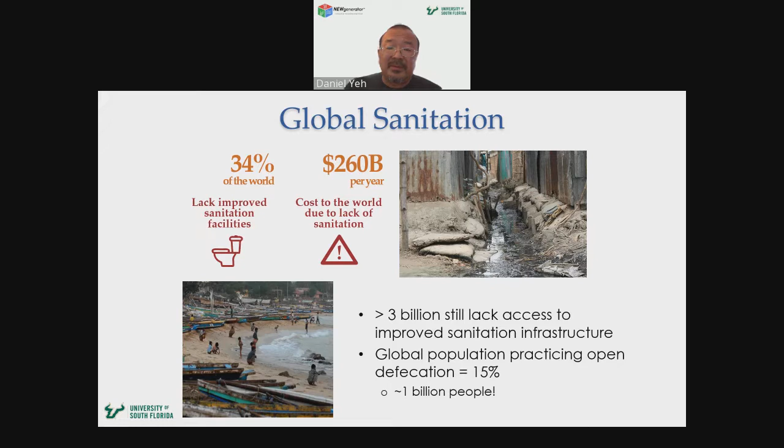So it's a big problem, and you might wonder why don't we just solve this with the technologies that we have right now? We're often faced with maybe two types of choices when we're looking at sanitation.

Most people here in the United States are familiar with the centralized approach, where we have sewer systems connecting our households, businesses, toilets, collect all the wastewater through the sewer system and send it to a centralized treatment system. And this was largely made possible through the Clean Water Act.

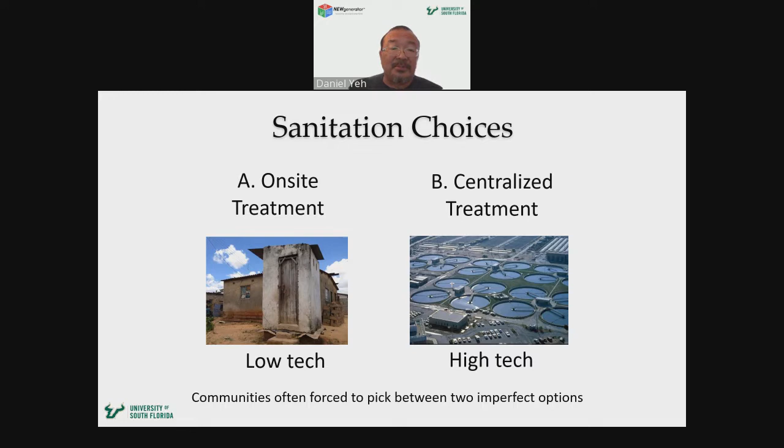We built a lot of infrastructure. And if you don't have this, then you're forced to either use some type of on-site system, such as a septic tank, or if that's not possible due to soil conditions, oftentimes we use something like a pit latrine, right? So we're kind of looking at both of these options, but really not a whole lot of things in between.

Well, neither option is perfect. In terms of the on-site systems such as pit latrines, they're often faced with high usage rates. The ability for the pit to dewater is largely depending on the soil. So if you have poor soil conditions, it fills up very fast, and of course, it's very vulnerable to flooding. If you have a flooding event, and we're seeing more of that now with climate change, the contents of the pit will just be distributed where you don't want them to be.

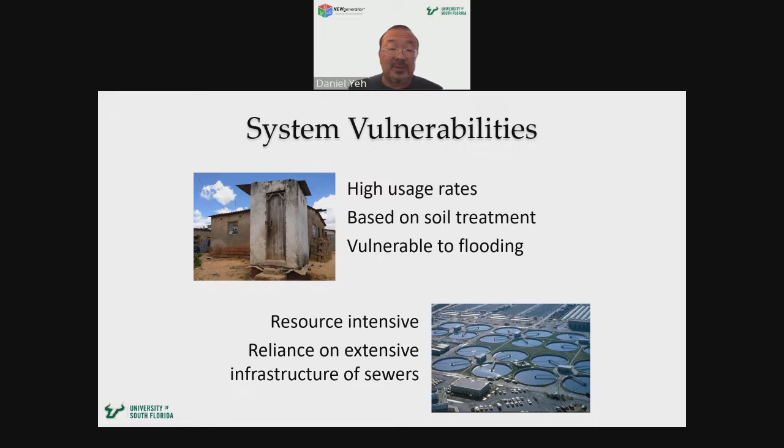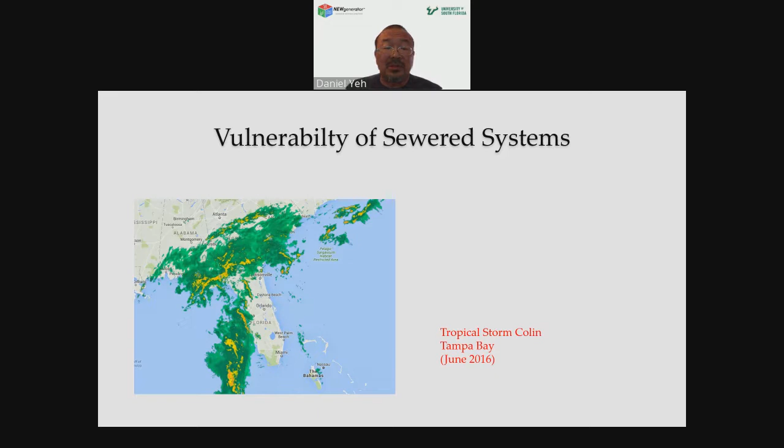So sewer systems are also vulnerable. Here is an example from Florida. I live in Tampa, Florida, and a few years ago we had a tropical storm come through, and you can see that in the weather map here, Tropical Storm Colin.

And the city of St. Pete Beach actually tweeted this out, saying, 'Hey, we have a sewer system emergency. Everyone, please stop using the sewer because the sewer is full.' I don't know about you, I never think about the sewer as an appliance.

It's very surreal. The municipality is pleading with homeowners to stop using the sewer because the storm has inundated the sewer system, largely because of sanitary sewer overflows, infiltration, and inflow problems. So sewer systems are vulnerable, by no means perfect, and there's a lot of maintenance costs involved.

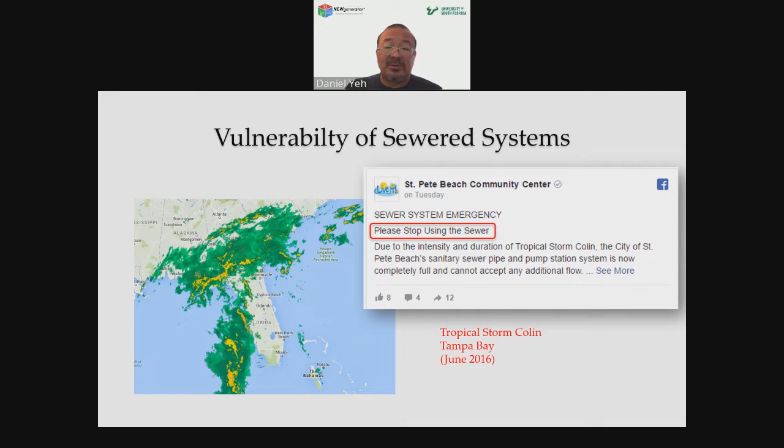At the end of the pipe, we have a centralized wastewater treatment plant, often based on gravity settling. This has issues related to large footprint, since gravity settling systems are land intensive. So this is not going to work where space is at a premium.

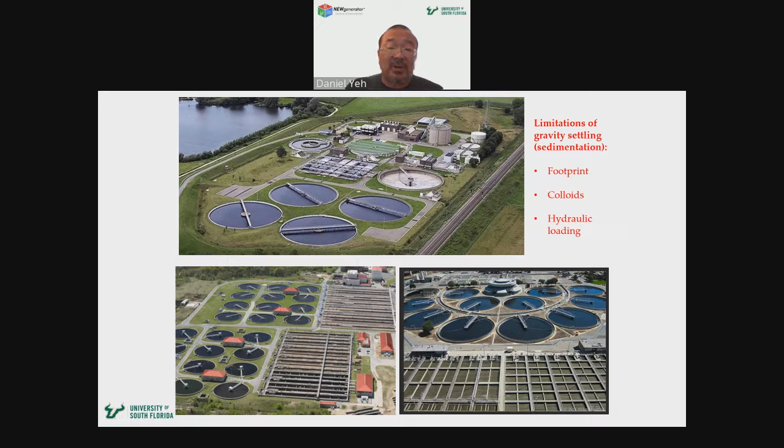For example, in slums, where you have very little space, a lot of crowding, high usage, and oftentimes slums are really unplanned, so it's very difficult to map infrastructure to the organic growth nature of slums. So if you want to provide sanitation in a slum environment, you're going to have to do process intensification, and you need a very compact treatment system, something game changing. If you can pull that off, I think that would be transformative and disruptive.

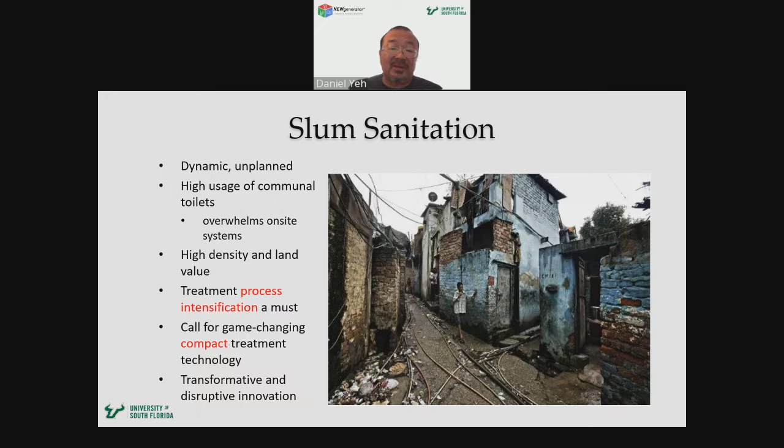So what we're really looking for to make this work is something transformative. It has to be effective, it has to work first of all, but then also it needs to be reliable. It can't just work once or work for a month, it has to continue to work, and you have to know how to maintain the system. The system has to be affordable. The end user may not be the one paying, but somehow the economic model needs to be worked out so that it's ultimately economically sustainable.

And it would be nice if you actually provide an experience that's aspirational, in the same way that we enjoy a lot of household appliances or smartphones. You want to have a good experience going to the bathroom, namely a flush toilet experience, if you will. Oftentimes that's what we get to enjoy in most places in the U.S., and we don't think twice about it, but many places in the world do not have flush toilets, and the experience is different.

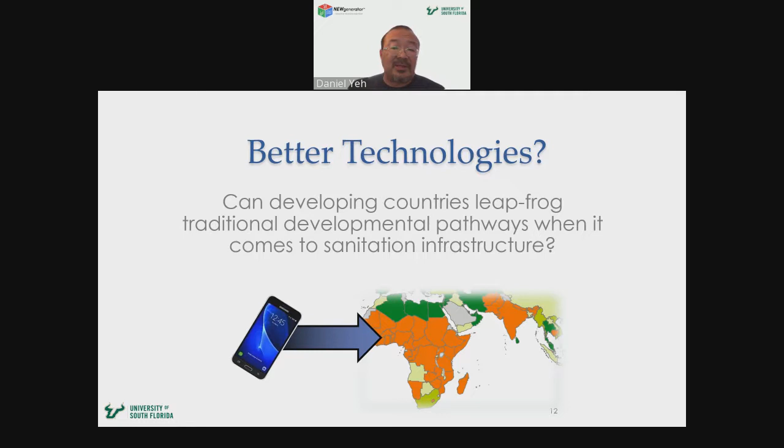So to make that happen, here's the question: as the developing world is building their infrastructure, do they have to go down the same path that developed countries went through, recognizing that sewer systems are not perfect, or can they somehow leapfrog these technologies, the way cell towers leapfrogged landlines in many places in Africa, giving a better technology that doesn't require landlines. So what we're really trying to do is fill the gap here, something that's on site but works a lot better than pit latrines, without all the intensive infrastructure maintenance requirements of centralized sewer systems.

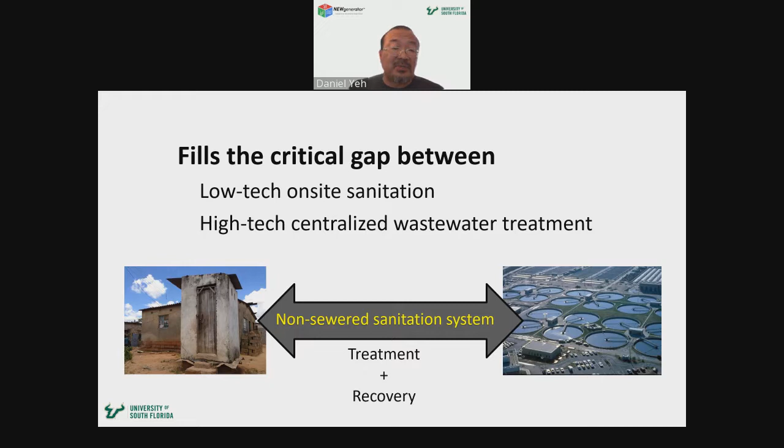So essentially, a non-sewered sanitation system, a platform. And not only do we want to do treatment, we also want to do recovery, because wastewater is a valuable resource. You can recover water, energy, nutrients, a number of things from it. So can we pull that off? That gave inspiration to the NEWgenerator project, or concept.

We envision a resource recovery machine that can recover nutrients, energy, and water on site, hence the name NEWgenerator. It will work as a platform or a box that you can insert near the point of generation, near the point of use. For example, provide a flush toilet possibility to something like a latrine system or a porta potty, and then you can recover the energy, recover the excess water, recover fertilizer, maybe for greenscaping or even to grow crops. The possibilities are endless.

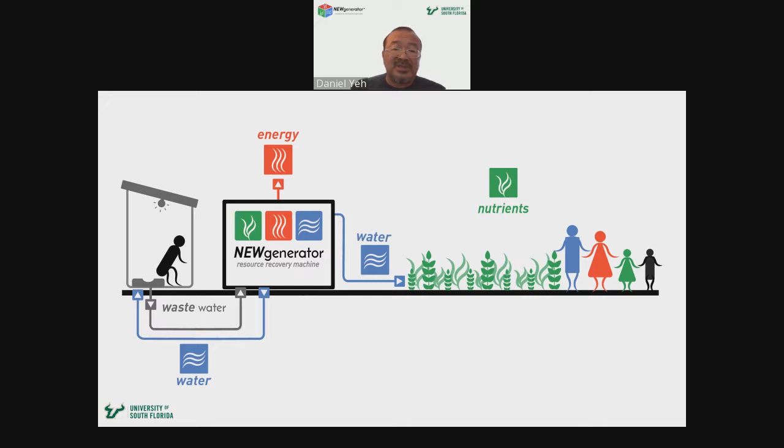So to do this, the first thing we're thinking of was, this really has to be a very non-energy intensive system. If it requires a lot of energy, that's not going to work in many parts of the world because of high energy costs and unreliable grid. So to make the process low energy, we decided to do anaerobic digestion.

This is something a lot of people are familiar with. Essentially, in anaerobic digestion, organic waste is broken down by anaerobic microbes, goes through the various stages of disintegration, hydrolysis, fermentation, and ultimately methanogenesis, so you can make biogas. The nutrients bound up in the organic matter are liberated, so you have inorganic ions of nutrients, and of course, you have water.

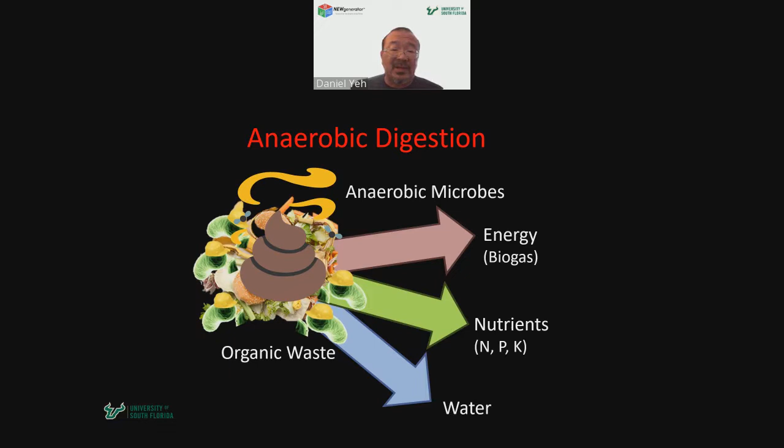The problem with conventional anaerobic digestion is that everything is mixed together, and there's really no good way of doing separation. There's a limit to the technology in terms of separation. Pathogenic organisms and colloidal materials are not going to be separated for the most part. And also, if you overload the system, it's very easy to upset it.

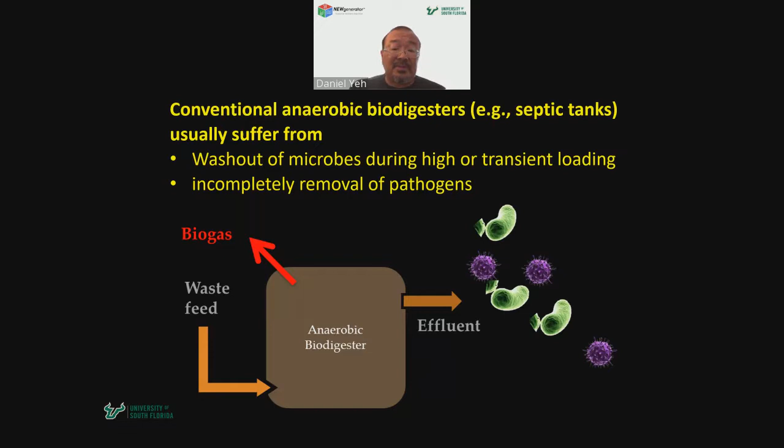So what can we do to improve on the anaerobic digestion process? One thing you can do is add a membrane to it, so that's a hybrid process. You're using a biological plus membrane filtration platform. Essentially, the exit of the bioreactor is covered by a membrane, which in this case is an ultrafiltration membrane, 0.03 microns, which is smaller than bacteria and most viruses.

So we get to keep everything in the bioreactor. The pathogenic organisms, we intercept them, and a lot of them die off in the reactor, or we concentrate them. The slow-growing anaerobic organisms are also kept in the bioreactor, so we overcome some of the kinetic limitations and throughput limitations of conventional anaerobic treatment. You can then combine this process, and this is an anaerobic membrane bioreactor.

And this technology has shown itself to be quite robust and flexible. For example, it's not always the bioreactor that's doing the treatment - every second, every minute, it's actually the membrane during the filtration, during the rejection. So the membrane provides an absolute barrier for very high quality water right off the bat, and really, the biology is there for management of solids and residuals.

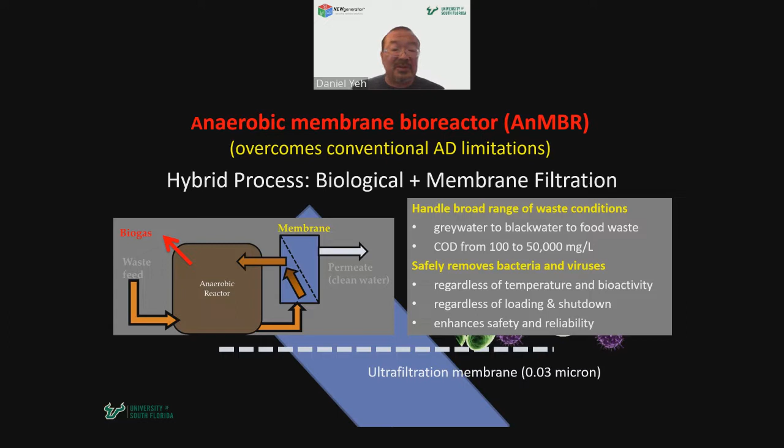Because of that, you can use an AnMBR to treat gray water, black water, or food waste - COD can range from 100 to tens of thousands of milligrams. So it's quite robust, and you can safely remove bacteria and viruses. It doesn't matter what the temperature is, doesn't matter how active the microbes are, and most importantly, you can handle intermittent loading and shutdowns and dormancies, and have very fast restart.

And these are all very important criteria when you're looking at on-site sanitation systems, because they're going to be used in sort of a non-steady state fashion.

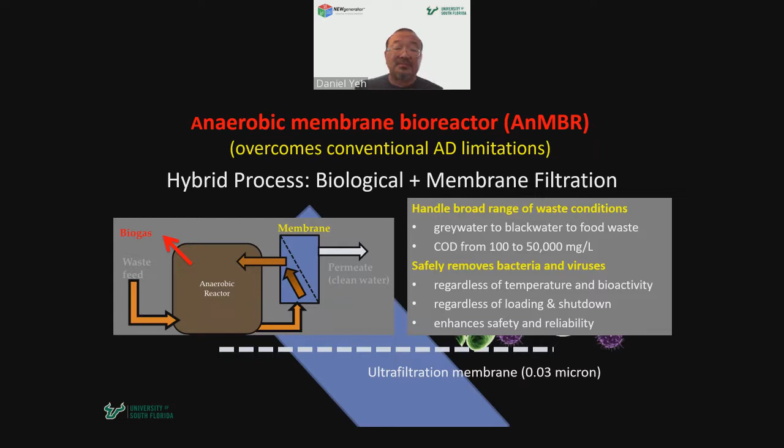How does this anaerobic MBR compare to the more conventional aerobic variety? Well, there's several advantages. One is the much lower biomass production - from your bioprocess class you know that the sludge yield for anaerobic systems is 8 to 10 times less than aerobic microbes. So automatically, there's a much lower desludging requirement, which is one of the pain points for on-site systems. There's no aeration requirement, so you don't have to aerate to keep the bugs alive, and it cuts down considerably on the energy requirement, which improves its reliability because you don't have to provide the energy.

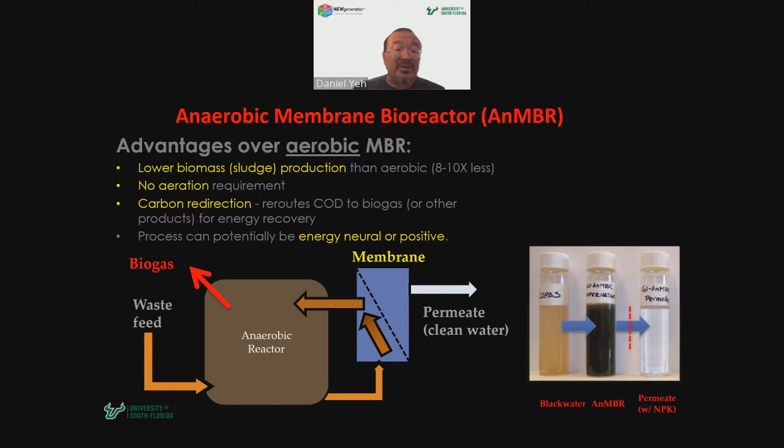Essentially, it's a carbon redirection process. Rather than just oxidizing the carbon and having it be emitted as CO2, we get to redirect it to methane and have the opportunity to capture that as an energy source. So theoretically, we can go energy neutral or even positive with this process.

Now, as we developed this technology, there are a couple of frameworks that guided us. The first one is we were fortunate to participate in the National Science Foundation's I-Corps, or Innovation Corps program. If you haven't had the opportunity to participate in I-Corps, I very much encourage you to do that. There's different ways to get involved - either you have an NSF grant and you can apply for I-Corps, or many universities around the country have I-Corps site programs that students can form teams and participate in.

But what I-Corps does is it helps researchers think all the way down the road in terms of what the customers, the end users, want. A lot of times as researchers, we have assumptions about how our inventions or technologies could be used, and very often there's a mismatch between that and what people really want. So I-Corps takes you through this customer discovery process - you actually talk to people, you find out what their pain points are, and this is really important.

What is really bothering people? What do they wish could change? What do they really want out of some improvement? Because whatever solution you provide, it has to solve that problem - you don't want there to be a mismatch. And also, you start to think about your technology not in terms of features, but in terms of what value proposition you bring to this relationship with the end user. For example, you can make their life better somehow.

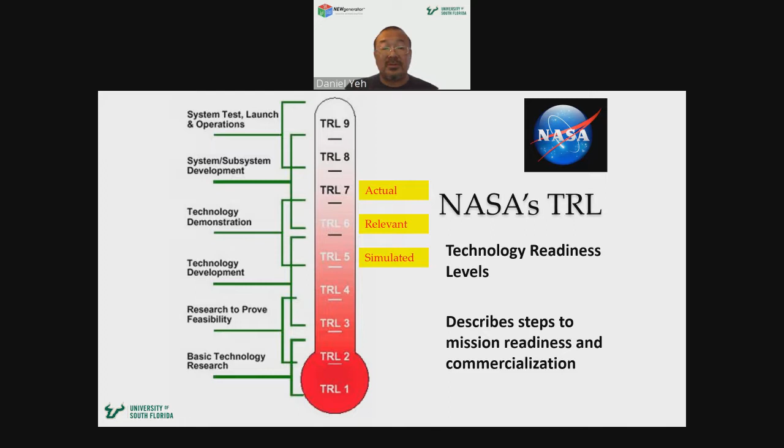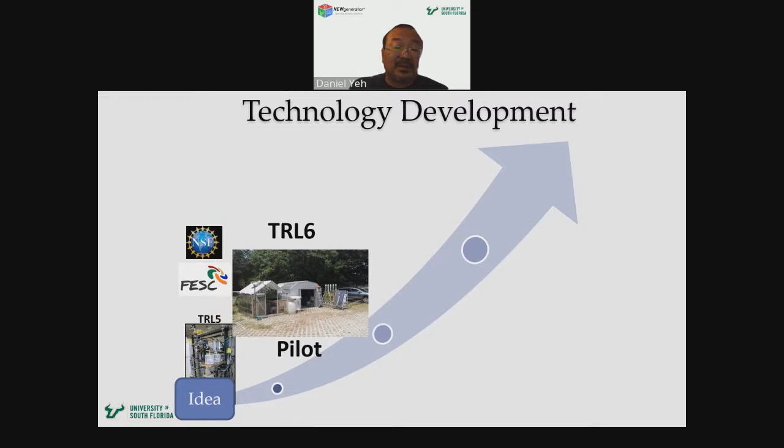So we use this framework to guide our process. We started with the initial ideas and built our laboratory systems—this was the TRL 5 system that I'll describe a little bit, along with the funding sources. Then in the TRL 6 system, we went out of the lab to a septic tank. Later, for TRL 7, we had the opportunity to go to India—that was the early phase of our technology development.

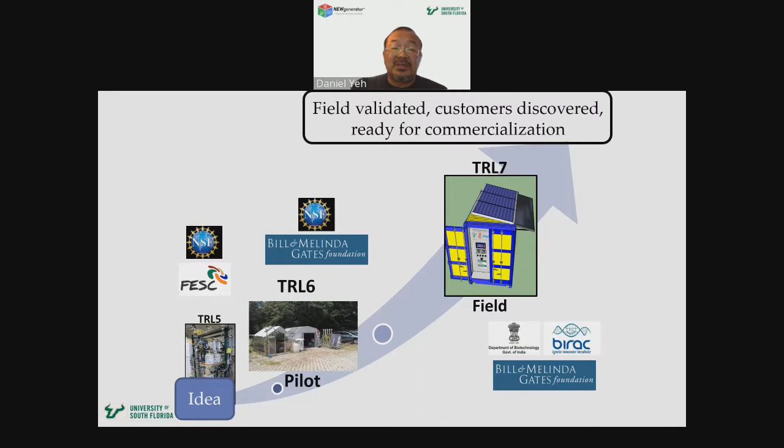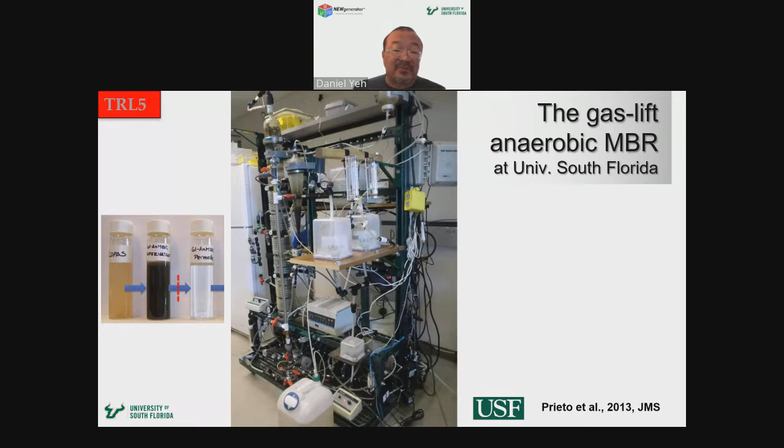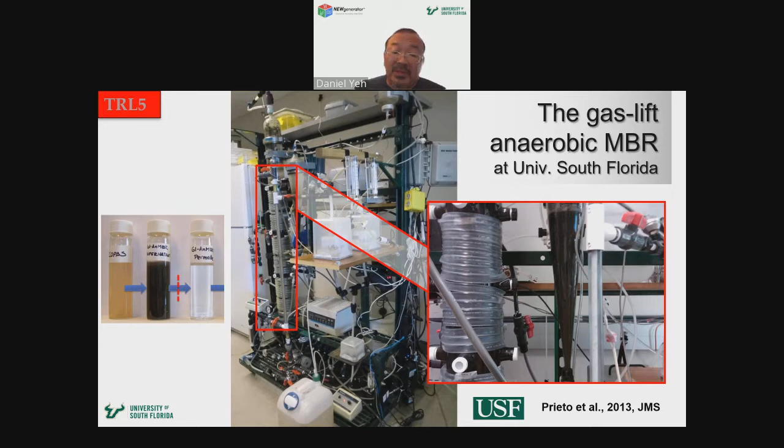So I'm going to talk about our journey through TRLs 5 to 7. In TRL 5, this was an anaerobic membrane bioreactor we had in the lab. It's not a NEWgenerator yet, but it's a platform where we were able to evaluate the core technology, the anaerobic MBR, and get familiar working with it, understanding how to overcome limitations like membrane flux and how to consistently get high quality water. You can see in this picture the membrane is a tubular membrane—a single tube tubular membrane anaerobic MBR system. We got the membrane from Pentair, using their X-Flow membrane.

Based on the laboratory results, we went on to a TRL 6 pilot scale system. At this point we were thinking we need to advance towards building a machine—what you saw before was a mishmash of wires and tubes, not something deployable. So this needed to be packaged. I went to Home Depot, bought a hardware closet for tools, and we packaged our bioreactor within that with some basic control system—that's what you're seeing in that TRL system.

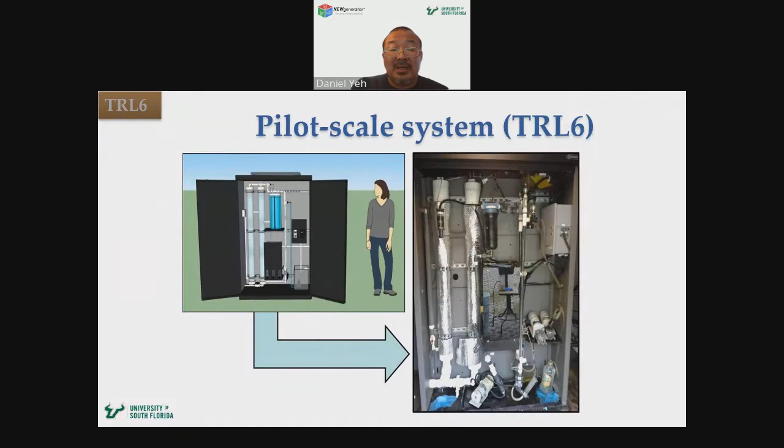And we needed actual wastewater. My kids at the time went to an environmental school in the Tampa Bay area called Learning Gate, and they have a septic tank. So we went to the school and asked, 'Can we please have access to your septic tank?' They said, 'Sure, knock yourself out.' We put our TRL system right over the septic tank, pulled contents from it, and treated it.

We decided to do more than just treat the wastewater, because we had NSF funding involved, and with NSF funding you have to do a lot of education and outreach for broader impacts. So we said, why don't we turn this whole thing into a demonstration platform—BRATS, the Biorecycling, Bioenergy Research and Training Station.

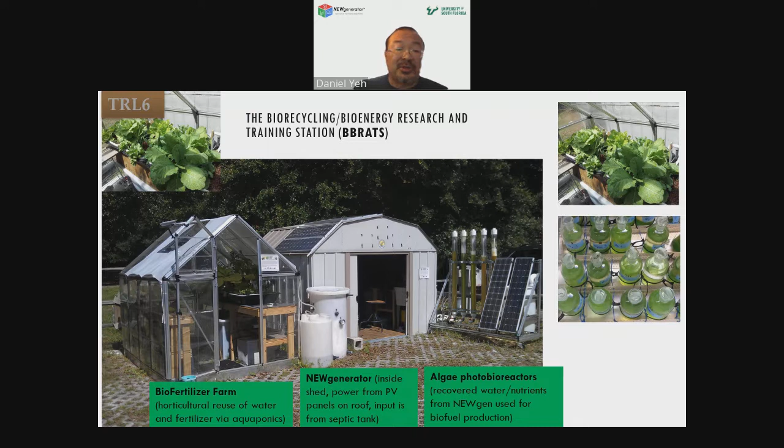Not only did we treat the wastewater, we demonstrated reuse—repurposing the effluent for things like growing microalgae, and we set up a greenhouse where we grew different crops. We also developed a number of lesson plans that were ultimately picked up by Teach Engineering and the University of Colorado.

So we had a lot of fun doing that. Here you see two of the students, Jorge Calabria and George Dick, who are very much involved with the development of BBRATS. From there, we knew how to operate the system in the relevant environment, subject to temperature fluctuation issues and the actual wastewater fluctuations you come across.

So when we went on to TRL 7 - by this point, I should mention that for our TRL 6, the work was funded by the Gates Foundation through a program called Grand Challenges Explorations. That program is still ongoing. Essentially, it's $100,000: you submit a 2-page proposal, and if it's a really good 2 pages, you get $100,000. First time I tried, didn't get it. Tried again, got it on the second try. With that $100,000, that allowed us to do the TRL 6 system.

So we had some promising results, and then later got additional funding through the Gates Foundation, also in partnership with the government of India, and said, let's build a system that you can deploy to India. And wow, okay, this is a huge step, right? We never built anything like this.

So we start to envision what the NEWgenerator would look like. We started to draw things up on SketchUp and got really good at drawing things on SketchUp. I said, well, this needs to be decentralized on site. These are the core requirements: has to safely sanitize waste, has to be modular, plug and play, operate off of renewable energy, has to be compact, autonomous.

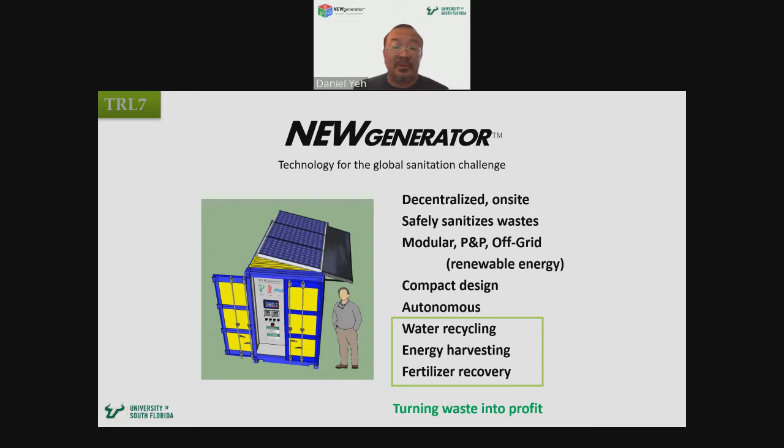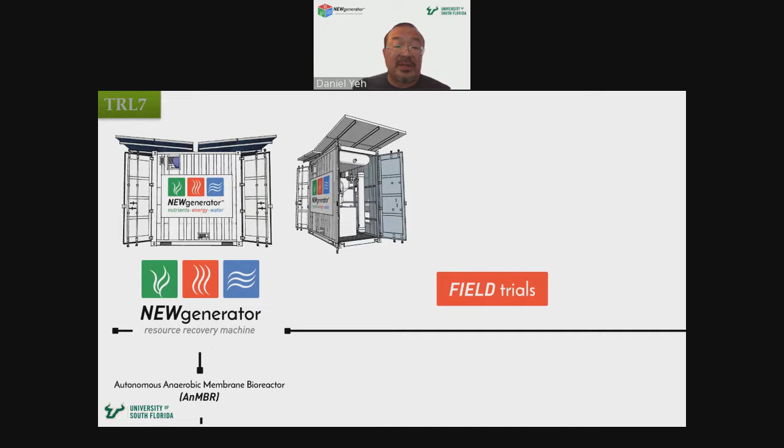So on the TRL-7, this is an actual system that we deploy. Our SketchUp skills got better - this is what it looks like. And we deployed our system to Trivandrum, India, in the state of Kerala, in the southern part of India.

In India, we were partnered with a company called Eram Scientific. When you're doing research, you can't do everything by yourself, so you have to look for partners. This was a really good partnership in that Eram Scientific was started by a group of people who are in the IT business. They recognized that India has large sanitation issues, and one of the big problems is nobody likes to use the toilet because they get dirty and smelly, and nobody wants to use them.

So maintenance was the big problem. And I said, well, what if we can automate the toilet cleaning, right? Because we're IT guys, we know how to do that. What if we can have an automated toilet that cleans itself? And further, we can monitor the toilet remotely, and if there's a problem, we can then send somebody to check it out. So they did that.

These systems were quite popular, sold very well. They started to sell them all throughout India. But then they ran into a pain point: Indian-based sanitation systems are very water intensive. Because instead of using, say, toilet paper afterwards, I use water to clean up. And where's all that water going to come from? In places in India that are water scarce, and with climate change, this is getting worse.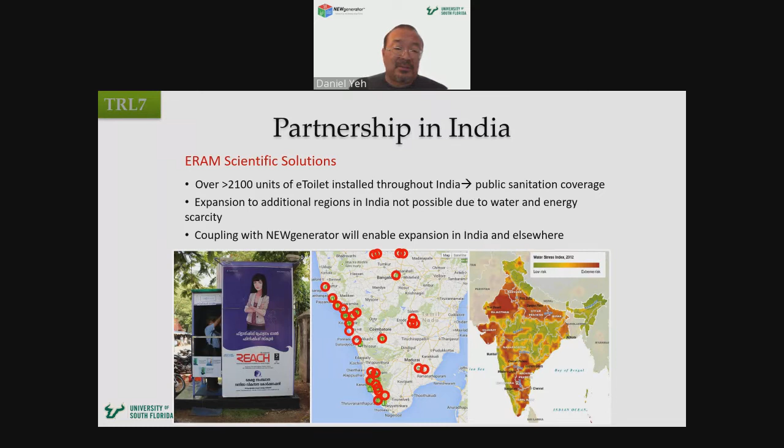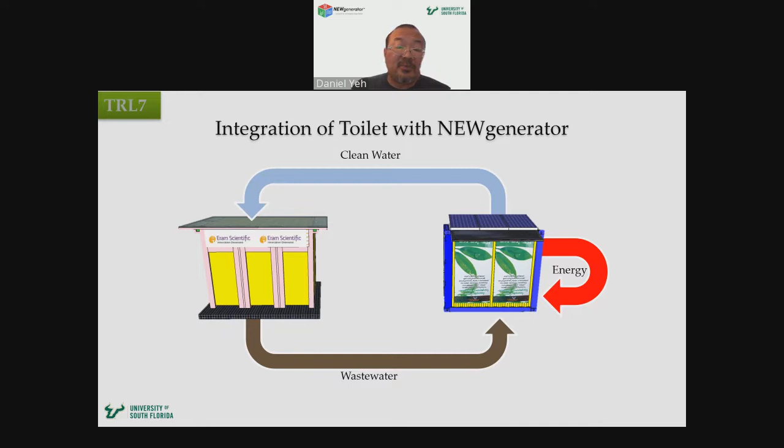So somehow they're going to have to recycle the water, but they didn't have a technology to do that. Well, we did. So our scheme was, let's team up with ERAM - they can provide the front end toilet, the front end user interface, if you will. We'll provide the back end system - we'll treat their wastewater and return clean water back to flush the toilets. And along the way, we'll harvest some energy if we can.

And we couldn't just do it with just the ANMBR, even though that's the core technology. So the anaerobic biodigester is coupled with the ultrafiltration membrane, and you have to disinfect the water still - one more time past that, at least one more time, to have multiple barriers.

So we use this electrochlorination process that I'll describe a little more. And that was sort of the platform.

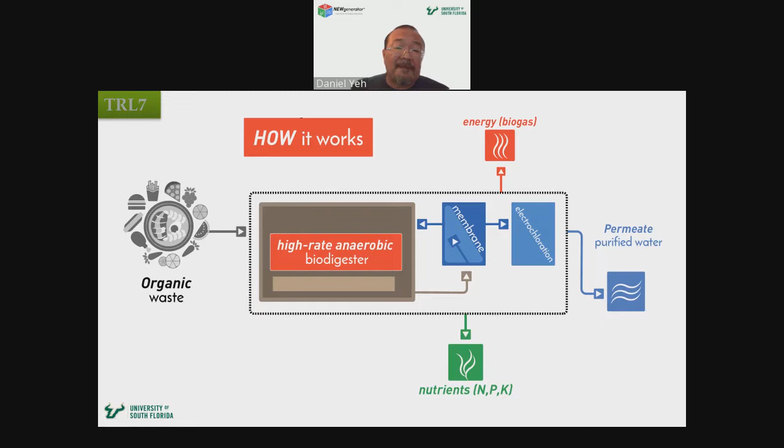We decided to put this inside a mini container. We considered a number of different options to house the system. I even thought about buying a phone booth to put it in, and ultimately came across these mini containers that the military uses. This particular one is a quad-con, which is a quarter of the size of a 20-foot container, and four of them can snap together to form a full 20-foot container. So there's some standardization, some modularity involved.

So we acquired a container and started to build our bioreactors, tanks, and got those delivered. This was the start. What you're seeing there is the bioreactor. You have the membrane module, and you have our product water tank. That was the beginning.

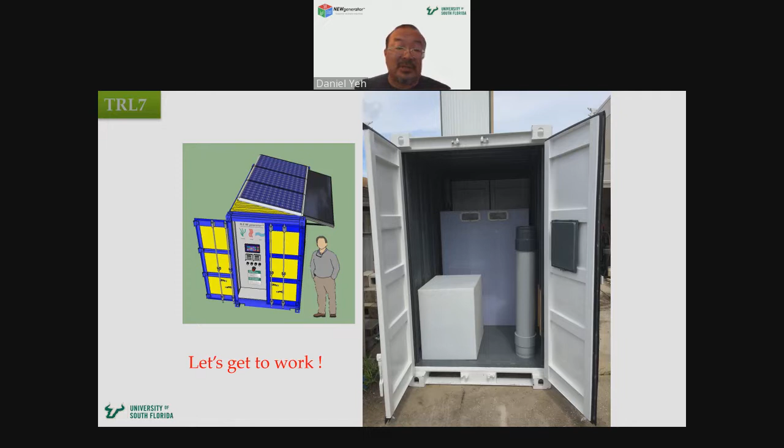Our membrane module was donated by Pentair, and these are really awesome, high-performing membranes. We tested a lot of different membranes over the years, and Pentair's are great because we're treating high solids in our system, and we want a system that wouldn't clog easily. There's fouling, there's membrane fouling, there's also membrane clogging, so it's important to have proper distribution on the feed side to the membranes. These Pentair X-Flows did the job for us.

There's a constant recirculation loop of the contents from the bioreactor that goes to the membrane module, from feed to concentrate, and then you have a permeate pump that pulls out the permeate along the way.

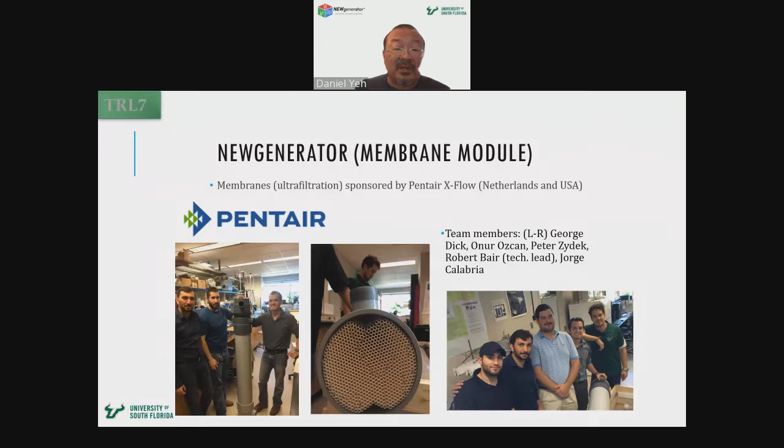Here you see some of the students involved during that stage: Robert Bair, George Dick, Onur Ozcan, Peter Zydek, Jorge Calabria. They were the core members who did the India phase of the work.

And we started to build. We built the solar panel, put together the battery pack, and the control system. Things started to come together.

This was literally us building the plane as we were flying it, because we didn't have the experience, but we got funded, which means we're on the clock and have to deliver the system by a certain day. So we're essentially designing and building at the same time, spending a lot of time in a conference room in front of the whiteboard, sketching things up and trying them.

Then came the part where we asked, how are we going to automate this thing? All of us are civil engineers, environmental engineers, and knew very little about automation. One of the students said, there's this thing called Arduino, a microcomputer, microprocessor, maybe we can use that. I know how to code it, but not well.

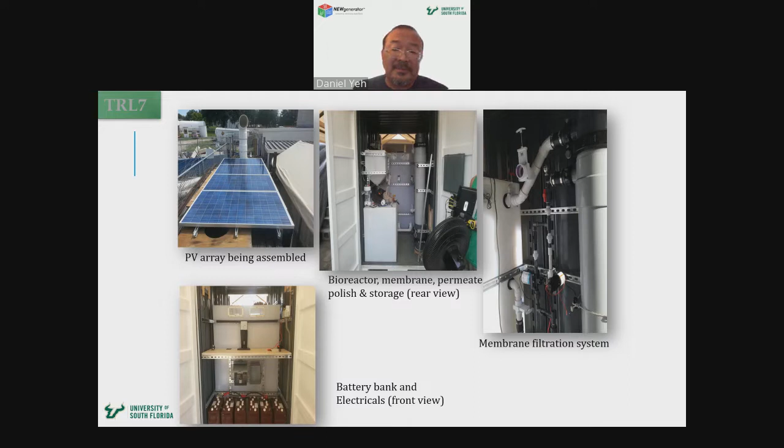So we reached out to electrical engineering and found a student who was an Arduino whiz. He helped us do the automation for the system and built the whole thing to run on an Arduino Mega. Here you see the more completed system with the membrane module.

What you see in the forefront is the electrochlorination system. Essentially, you input table salt to make a brine solution, and electrochemically that gets turned into chlorine gas, which is then swept into the cell, becomes hypochlorous acid, and basically bleach. So bleach is made on demand as we need it, which is important because it's very difficult to store bleach, and it's also not safe to store.

So all we have to store in our system is table salt, which makes things a lot easier and much more reliable. What you're seeing in that bag is not the final biogas storage bag, but essentially a variable volume for the headspace of the bioreactor.

Okay, so we built a unit, and we had to get it deployed before the end of the year. So I had to learn how to do shipping, heavy freight shipping, and looked at a number of different ways to ship. I decided air freight was actually competitive, and there are planes big enough to hold a container.

So we went with UPS Heavy Air Freight, and they put it in one of their planes and shipped it to India. Of course, with our luck, we ran into historical flooding in Chennai, which basically inundated the entire city, and even airplanes were floating down the runways.

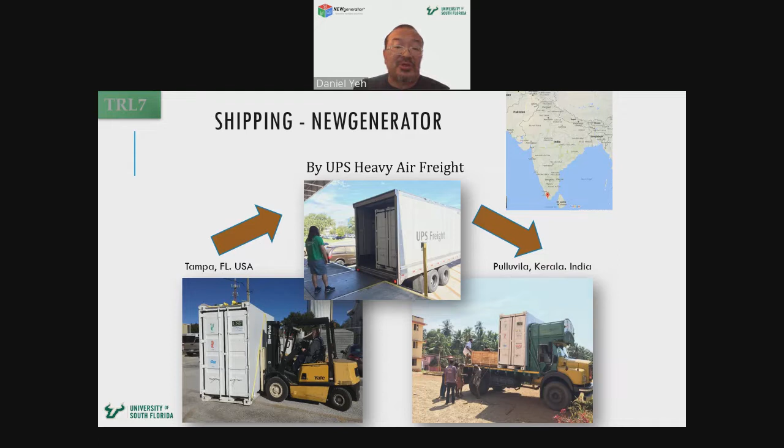It was so flooded that our shipment got delayed in Europe by a couple of weeks and couldn't fly into India. By the time it finally flew there, we were behind schedule, rushing to get it on site, trying to do all of this before Christmas. But then the truck showed up, and that was a very happy day when that truck carrying the unit actually showed up.

So here's me in front of the truck, and the unit got delivered. It was about to get installed on site. So here's me, live tweeting the installation of the system. I was such a happy person. I had to change my travel, but I got to see the system get on site. So we got that installed.

So the scheme at the site is to have two of these e-toilets, provide the front end interface. And by the way, this was installed at a school in Trivandrum. So the front end toilets will be these automated toilets. They'll generate the wastewater, go into a holding tank. We'll pump it up, treat it, recycle it back to the toilets for toilet flushing.

And it was a big hit. The students love using it. But we also found out about all the ways that the system can break. For example, we even found a T-shirt shoved down the drain pipe. So we definitely learned a lot about reliability and maintenance requirements.

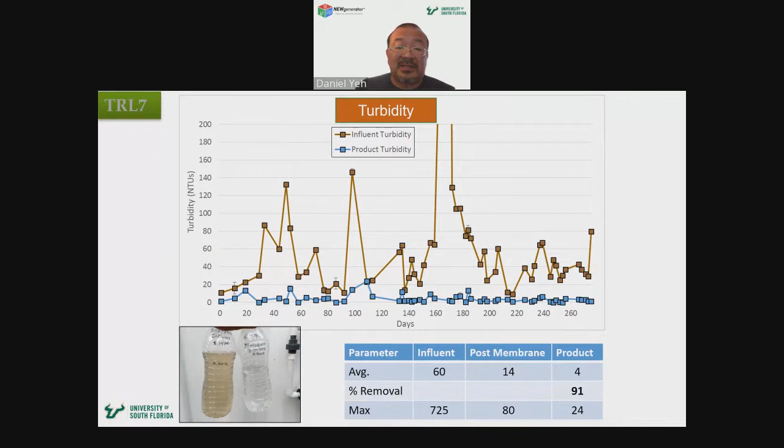We ran this entire operation for about a year, and the whole time it was off of solar, and we were able to treat and recycle the water. Here's just some quick data on what that looks like in terms of turbidity incoming and exiting. This unit was near a sports field, which generated a lot of dust. It also gave us good experience on how to maintain a solar panel against dust coverage.

We built a hydroponic system on the side of the unit for two reasons. One was that was our attempt to maybe do some nutrient management or nutrient recovery. The other is really for education and beautification, if you will, of the system.

Well, it turned out to be problematic because the kids, especially younger kids - kindergarten, first grade, second graders - love to pick those plants out of the hydroponic system. So pretty much the bottom 3 or 4 rows were just constantly being pulled out by the kids. So lesson learned: if there's anything really integral to the operation of the system, you cannot put it on the outside. It has to be inside of the container.

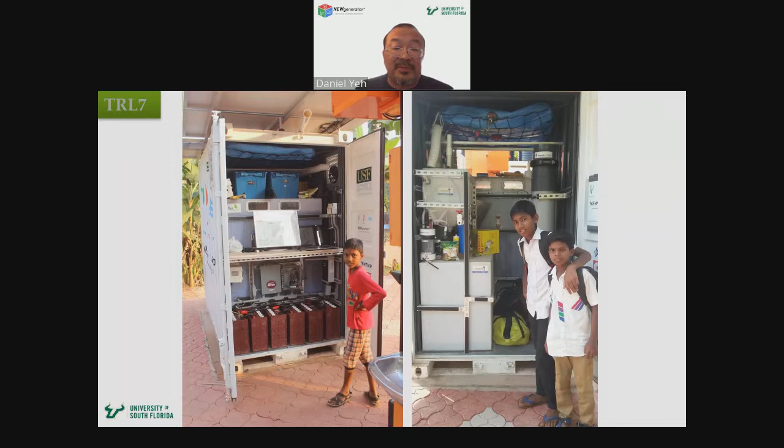Okay, and here's some pictures of the unit, with the control system, battery bank, and also on the wet side with the membrane module and the treatment unit. And here's another picture of the whole setup.

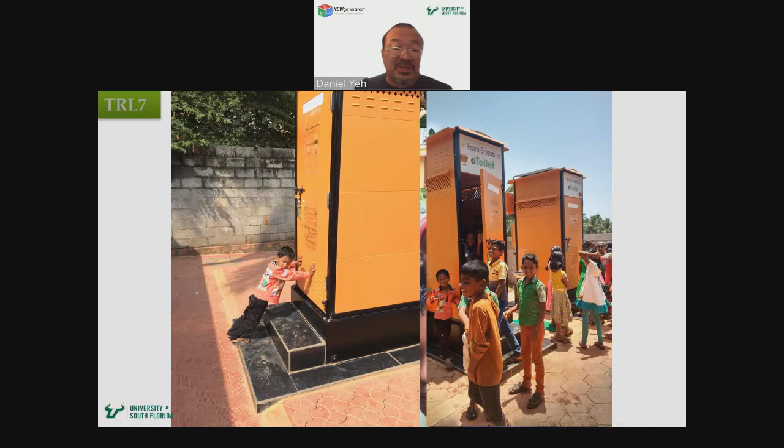So this was a very nice project in a way that we really got to interact with the students, and it's just great seeing their happy faces. And this was right around Christmas, so there's some Christmas celebration. And one of my favorite pictures is this: here's a child trying to prank his friends, trying to lock his friend inside the toilet. Of course, it didn't work. They just opened the door and they came right out.

But anyway, so from India, we pivoted and got additional funding and went to Durban, South Africa. And what we're hoping to accomplish in Durban was to treat a different type of wastewater. The school wastewater that we had in India was rather dilute, and that's largely because of two things: there's a lot of water use in the Indian type of sanitation, and kids essentially went to school to pee, but not so much to poop. So our COD was quite low, just a few hundred. We were able to handle that, but we really would like to have COD in the thousands or even tens of thousands.

The Gates Foundation was setting up a platform, a technology demonstration platform in Durban, South Africa. So we went there. And Durban has some very interesting situations that are quite reflective of the rest of South Africa and probably many parts of the developing world. It's really just rapid, unplanned urban densification.

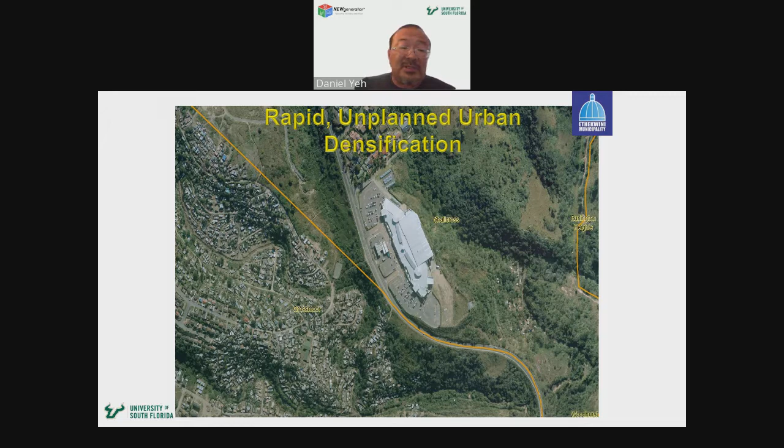So here you see essentially a factory that was built, and you see housing nearby. But as soon as the factory was built, people wanted to just basically move in and move close. So within a span of months - I'll go back a little bit - you can see the difference. People just moved in. Wherever there's land that you can put up a structure, people are living there.

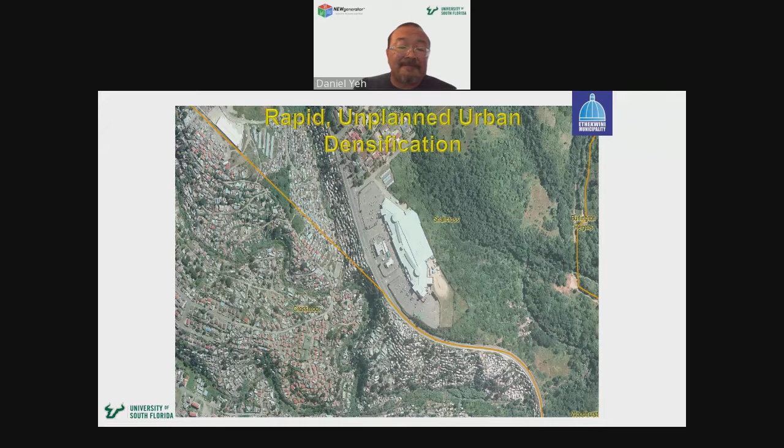So this type of situation makes provision of infrastructure very challenging. These are essentially informal settlements, and the South African government has a commitment to provide water and sanitation to people wherever they live. But if people decide to seemingly overnight live on a hillside, you have to figure out how you're going to run water and sewers up the hill.

So that was their pain point: how do we provide water and sanitation, especially solve our sewer problems? In Durban, it would cost billions of dollars for them to properly sewer the entire city. So that was definitely a huge pain point. And water scarcity is another one.

There was drought, and it would be good if they can cut down on water consumption. These are the portable water, sanitation and hygiene platforms that were used. Durban is a container port, so there are a lot of used containers, and these were converted into facilities for toilets, urinals, hand wash, showers, and laundry.

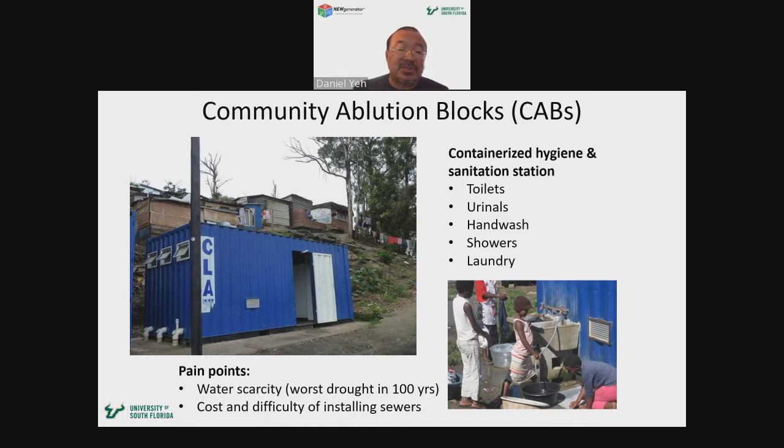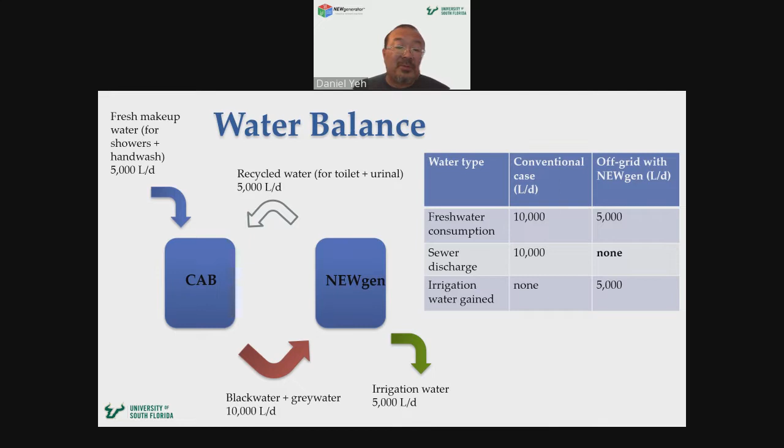The pain point was they have to build sewers. So if we're able to bring in a NEWgenerator and connect with these community ablution blocks, or CABs, we can do this. Let's say the CAB generates 10,000 liters of wastewater a day. We treat all of it, but recycle half of it back for use as toilet flushing. That results in 5,000 liters of makeup water, which goes to the highest grade of water for human contact, hand wash and showers. We generate clean water, but not potable grade, that could be used for toilet flushing. We get to save half the water, and generate this additional stream of water that could potentially be used on site for irrigation. It would be clean and sanitized.

We built NEWgenerator version 2. More experience, a little bit smarter, lessons learned, and we start to think about building a system a little bit differently, with a better control system. We also put in a nutrient management system internal to the container that I'll show a little bit.

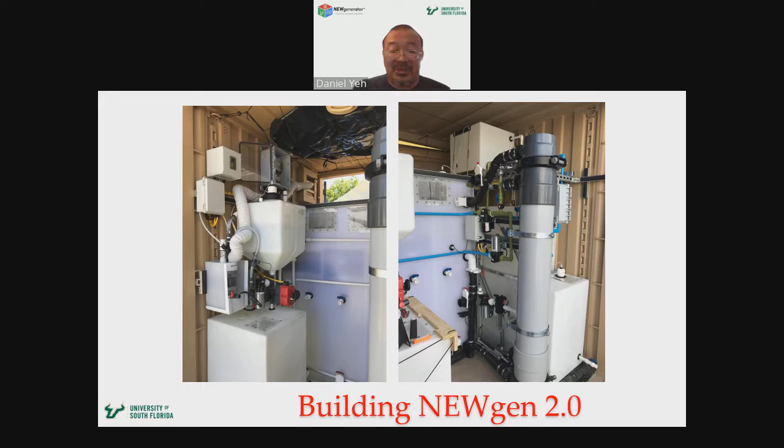Part of what contributed to the success of the South African project was the fact that we knew we were going to have an engineer on site to help us run the system. We were able to bring him to USF while we were still building the unit, so he learned to not only operate but troubleshoot the unit inside and out, and we were able to simulate a number of failure modes before the unit was even shipped out. This made all the difference because Lindelani was able to troubleshoot the unit on site, and he knew the system very well. That was definitely a key to success.

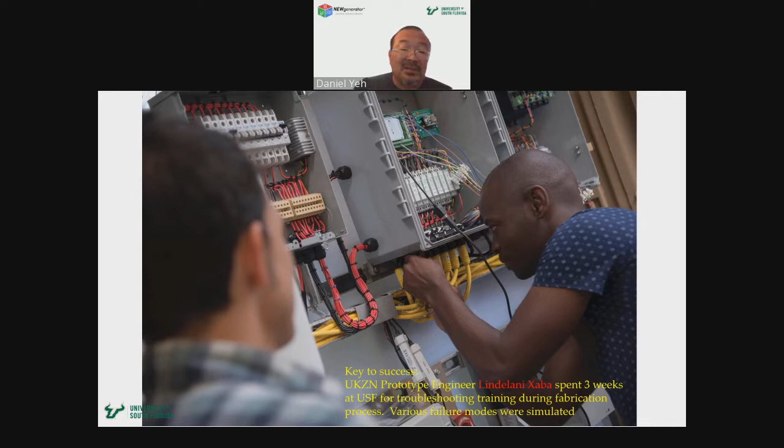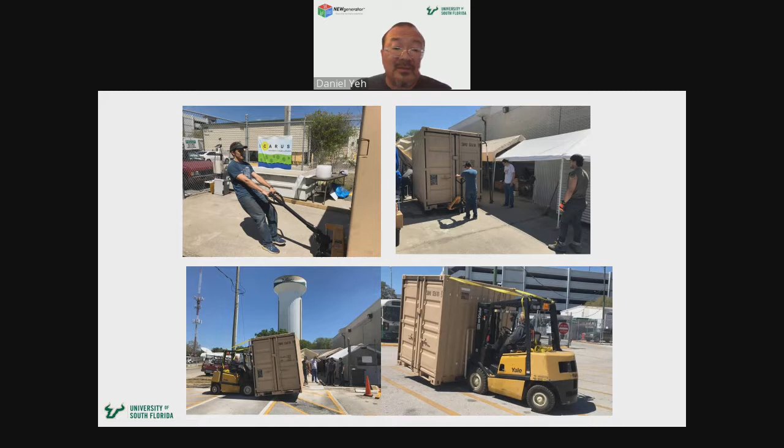So we built the system, and Robert was really excited. He wanted to get onto the plane as soon as he could. We had help from facilities to move it to the loading dock and pack it up. It went into another UPS plane, and this time it got to Durban very quickly. Durban has these really cool trucks with the crane integrated, which are really handy because you can carry and lift anything on site without needing two trucks.

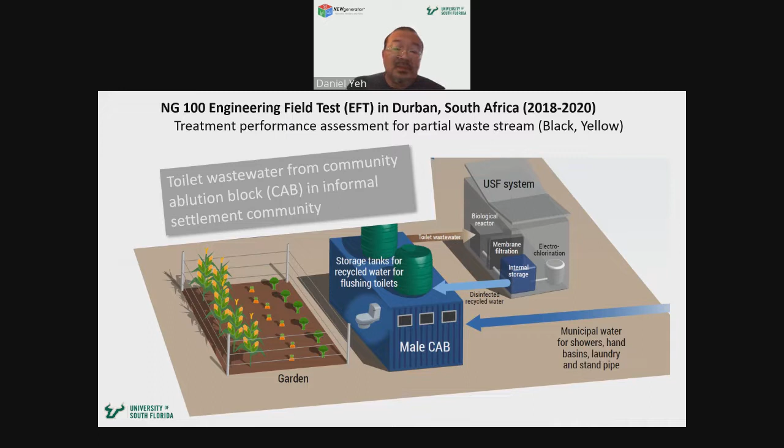We have some guiding principles for how we wanted the NEWgenerator to look like and to do, and we were able to refine and articulate those more as we went on. It broke into four categories. The first is that the unit has to be high performing - it has to have high capacity, generate high quality effluent that's pathogen free and suitable for whatever reuse is needed. It has to be resilient and robust and able to handle intermittent flows, because if you don't do that, this is not a sanitation system.

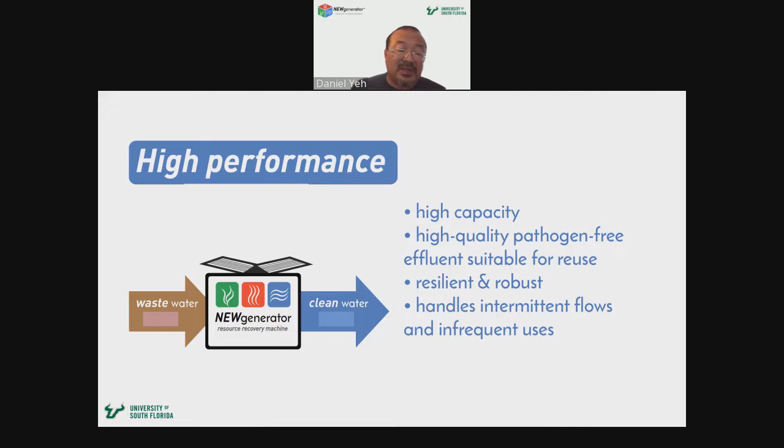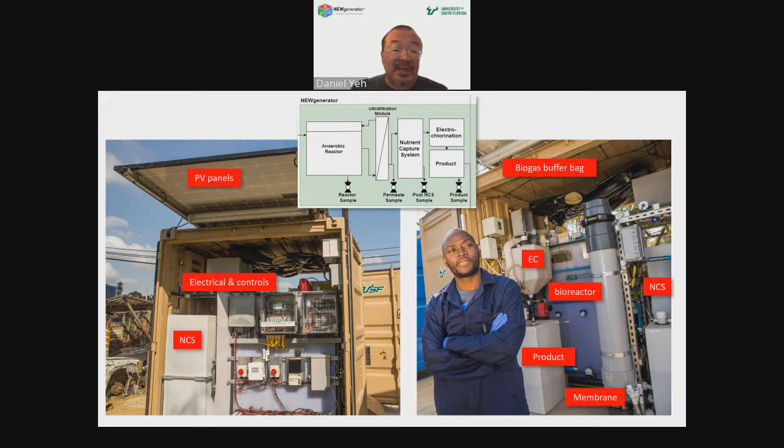I'll show you some data coming up. Here's the system from the two sides - you can see the bioreactor, the membrane module, the electrochlorination system, solar panels, battery bank, and control system, all that.

Here's our scheme for our setup in Durban. What's in that blue box is the community ablution block. We were very fortunate because we had the opportunity to modify the community ablution block and separate out the different waste lines so they all went into a valving chamber, and we were able to turn on and off the different types of wastewater that we wanted or didn't want. Anything we didn't want included just got diverted to sewer, so essentially we could pick and choose and generate with the wastewater that we wanted.

And the wastewater then went through a bar screen, through an underground equalization tank, and then through our system with the major steps of anaerobic membrane bioreactor, nutrient capture system, electrochlorination, and the product water. And then water gets recycled back.

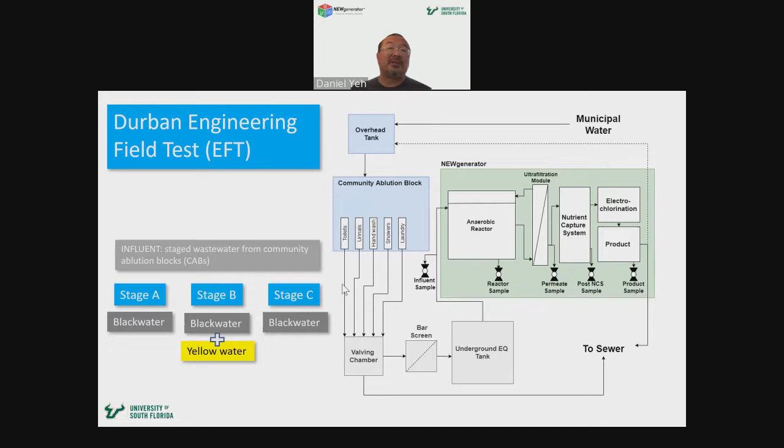We went through 3 stages of testing. First, with just black water from the toilets, which would be largely fecal material with some incidental urine in it. Then for stage B, we added in yellow water with urine, and then went back to black water later on for some additional qualification trials.

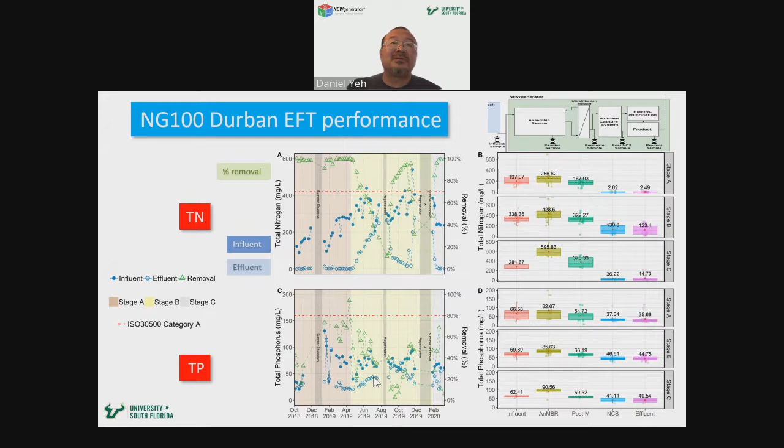Phosphorus is a different story. The system wasn't designed so much to remove phosphorus at the time, but we still got some phosphorus removal. I'll show you the results in the next slide - here you see the effluent numbers.

One thing we were doing in this field trial was working with a new standard called ISO 30500, the non-sewered sanitation system standard, basically providing a roadmap for certification for this type of technology. Here you see all the different criteria for effluent water quality, water chemistry, and pathogens. We were able to meet all of the water quality parameters except for phosphorus at the time - we were getting about 40% removal when the standard called for 80%.

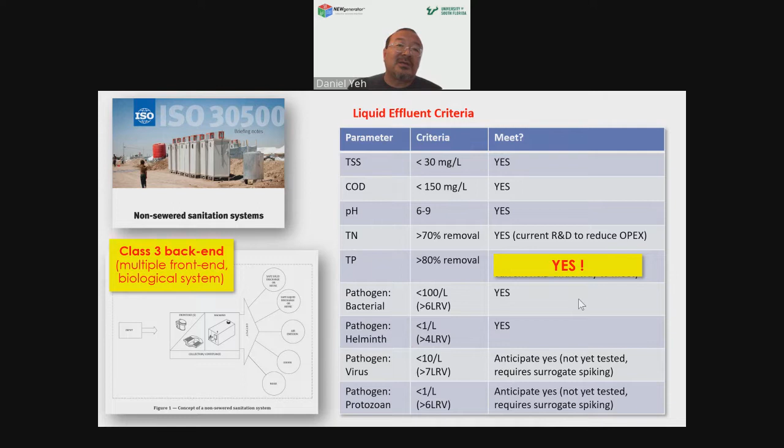And then there's some additional publications that are coming out, especially related to the horticultural study.

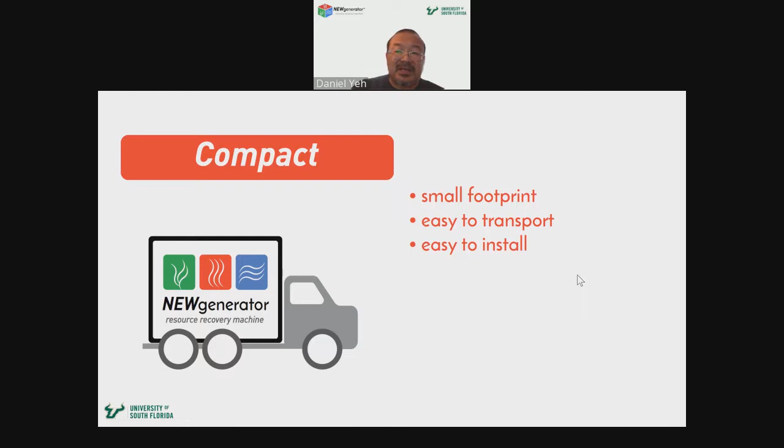The other category of features is the unit needs to be compact. We want to basically have process intensification. It needs to be a very compact, portable system with small footprint that's easy to install.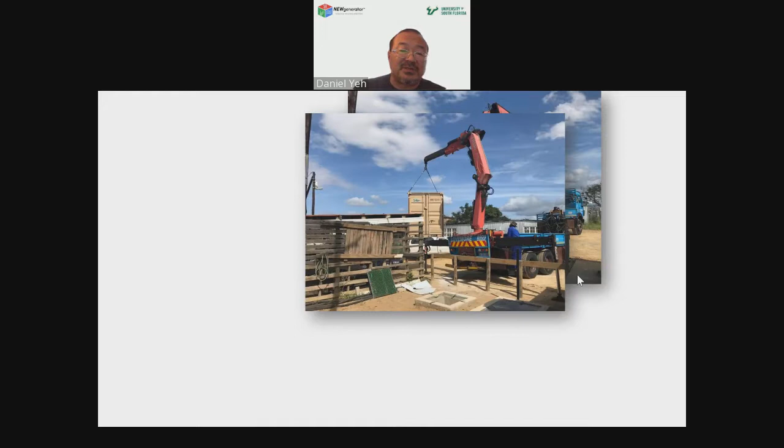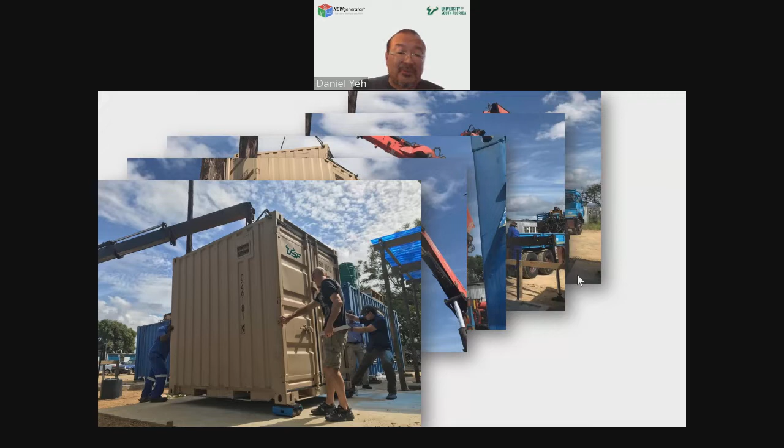Here you see some time series photos of the unit being delivered by that very nifty truck, right into the informal settlement. It swung over somebody's house, avoided telephone poles, and we were able to get it right on site. The whole installation from truck to site was about half an hour. Then we connected the plumbing, electricals, and we were off and running within a couple of days. Got the PV panels up.

The next thing is that we envision the unit needs to be simple to operate. You need to be able to basically start it up rapidly. We need to have autonomous operations, be able to control this with an app, and that's in fact how we designed the system, so that it's app enabled.

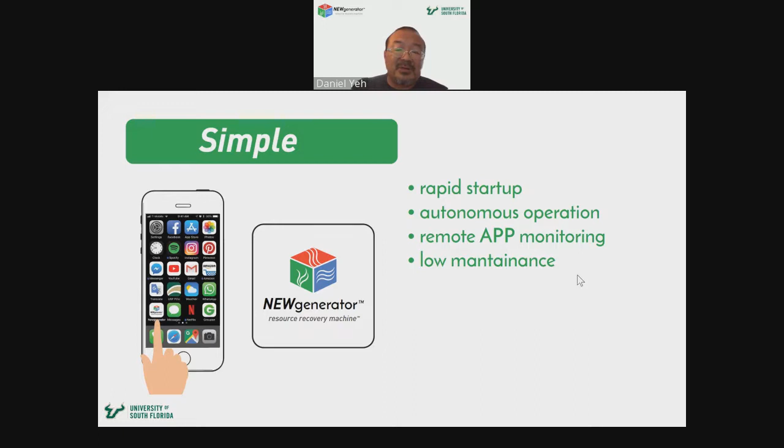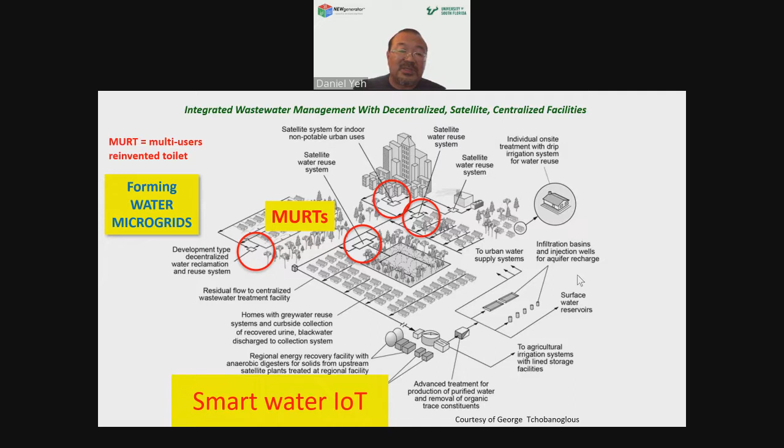We can track this remotely, and having those capabilities is important because here's a picture from George Tchobanoglous's textbook on water reuse. I see the future as a combination of centralized and decentralized units all working in concert, and maybe the centralized utility needs to be running all of this, and you need to have telemetry on all of these things. Otherwise you're going to have many points of failure. So you start to be able to form essentially water microgrids, to complement the centralized sewer system.

Have options, and depending on the size of a unit, you can either have a one-to-one, one unit per house, or maybe if it's too much technology, you can have a cluster of homes that report to one unit of NEWgen and recycle water back.

This can solve problems not just in the developing world, but I think in many parts of the U.S. About 40% of the U.S. is on-site wastewater treatment. We start to be able to form microgrids, being able to not just let water escape into the ground, but recycle the water. Or if the water just doesn't drain into the ground, like say in Lowndes County, Alabama, you can basically have a surface recycling system to deal with that.

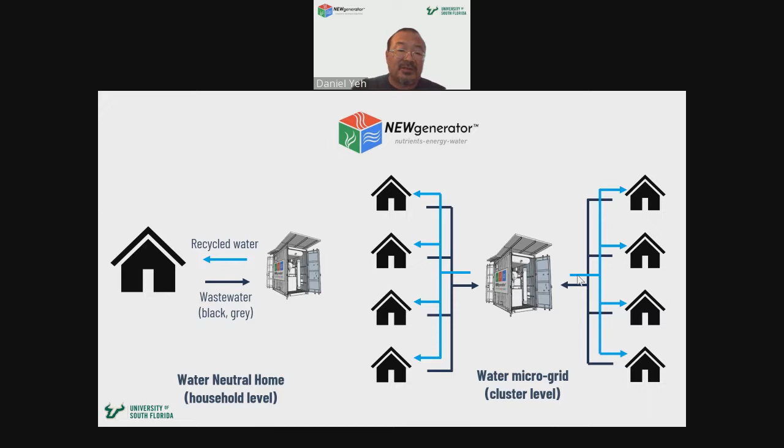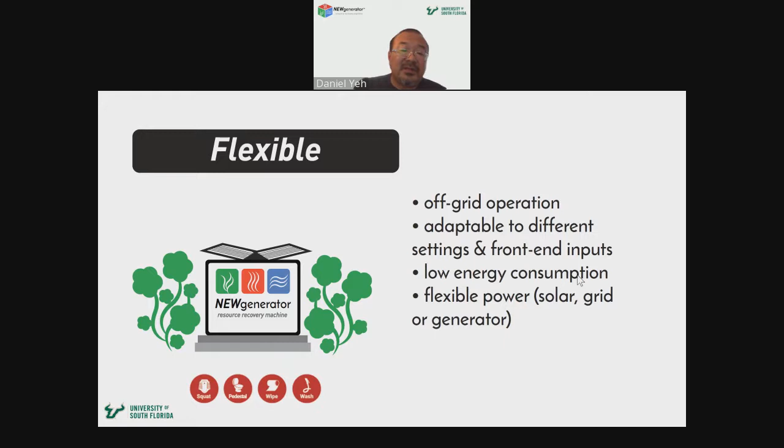Finally, the system needs to be flexible. You need to be able to use it for a number of different applications, working with different front ends, working with different end users and different applications. So we envision that the system could be used in slum environments, informal settlements, and also for ecotourism to protect the very beaches that people go to see.

Places like Hawaii have 80,000 cesspools, and that really shouldn't be the case. So tourism definitely creates problems in many places. Schools, parks, and also emergency and humanitarian settings like refugee camps.

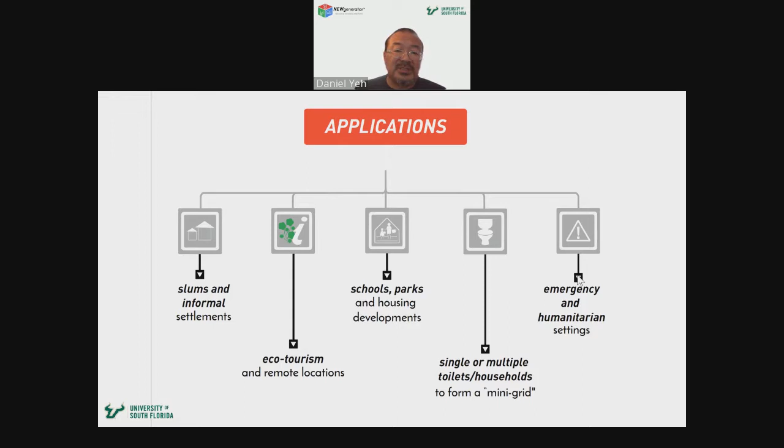Refugee camps are interesting because the host country often does not want to put down permanent infrastructure, because then the camp will become a town. So they go with temporary facilities, but that often means for sanitation it's a hole-in-the-ground latrine type of application. So if you can containerize the technology, then you're technically a temporary solution, but yet it's a much more robust and high performing system than a hole in the ground.

So I see for sustainable sanitation we really need three things. One is that you need a technology that will do the job. You have to have protection. You have to have that intervention, that barrier, and break down the cycle of disease transmission.

But going beyond that, the unit has to be affordable from a life cycle perspective. It can't just be cheap right off the bat. You have to think about the recurring operational costs. So it has to be affordable, but on a life cycle basis. And it would be nice if actually you provide some value proposition back.

So having a treatment system that can generate recycled water and give people a flush toilet that they didn't have before would be a nice value proposition.

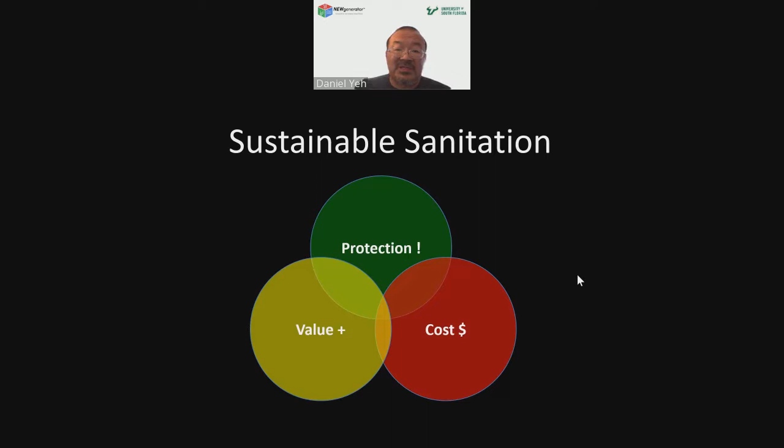Throughout this past many years, there's been some nice highlights. One of them was in 2014, we won the Cade Museum Prize. The group of students, we took first place, and that was a really nice validation of what we were doing at the time, that somebody thought what we're doing was a good idea, and they decided to give us the prize money. And then from there on, we've received other accolades.

One of the ones we're most proud of is in 2020 we received the Patents for Humanity award from the USPTO, saying that we basically applied our innovation towards something that will help humanity.

But probably the highlight is this: getting to meet Ronny Chieng and doing a segment on the Daily Show, a comedy segment, to talk about basically poop, and what Bill Gates and other people are doing about that. So that definitely was fun.

But back to more serious stuff. We talked about going to TRL 7 and beyond. So working with the university's technology transfer office and the Gates Foundation, we've been able to commercialize the technology. In addition, we continue to work with Eram Scientific in India, and now they are licensing the technology, building units of NEWgenerator for many of their customers.

We've also commercialized in South Africa, working with a company called Khanyisa Projects. Last November, on World Toilet Day, Khanyisa launched a system in a township near Soweto, providing a flush toilet platform that the folks there didn't have previously. What Khanyisa wants to do next is provide a sanitation platform for a school in the Eastern Cape. This is really challenging because that school, like many schools in South Africa, does not have electricity, running water, or sewers, which means either pit latrines or chemical toilets.

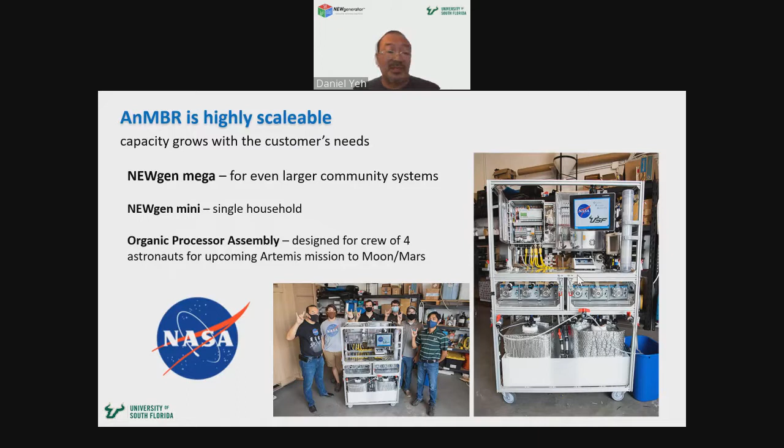So I want to talk about BTS - not the Korean pop band, but behind the scenes - in terms of what it looks like behind our work and some of the successes that we had.

So the first thing, obviously, are the students. I think as a professor, there's nothing better than working with students who are super motivated, bring different skill sets to the table, are highly committed, and have this can-do attitude that anything can happen. It's really great to see their contribution and how they've grown over the years, and we have so many students involved, giving them the opportunity to travel internationally and be part of this project.

Trying to list out all the names of the students and our partners in South Africa - the University of KwaZulu-Natal, who works with us in Durban and the Khanyisa Projects, providing field support. There's just too many people to thank, but here are some of the core people currently managing the project: Robert Bair, Cynthia Castro, Gary Shu, and of course Linda Lani, the prototype engineer.

Okay, so in terms of behind the scenes, the second point is you need a support system. Here I'm trying to get into a little bit of career advice now - we have a lot of students on the call, and many of you are probably looking to go into academia. I want to tell you, research has a cost, and it doesn't come without a cost. You need to decide what kind of researcher you want to be.

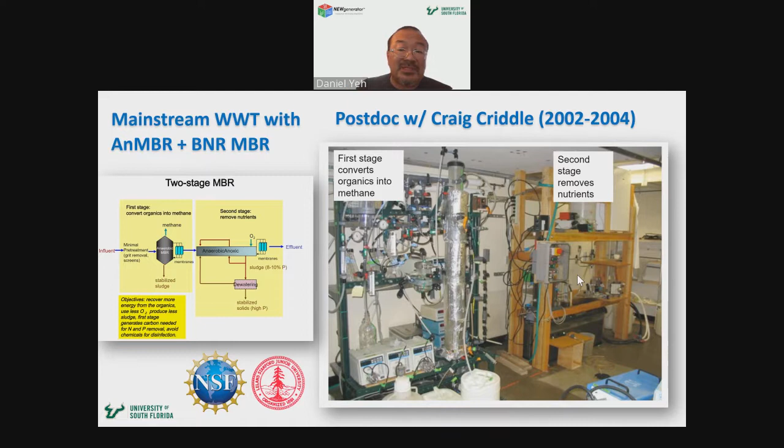Before I came to USF to be a professor, I came across an article in the June 2004 issue of Water Environment Technology from WEF, about the outcome of the Bellagio framework. A group of 14 water and wastewater experts got together for a retreat in Bellagio, Italy. I'm sure they drank a lot of wine, but they also came up with some heavy-hitting ideas. They outlined the attributes that made anaerobic MBR successful, but also what it still needed work on to fill the gap for global sanitation - cost and affordability, chemical usage, ease of operational use, and institutional acceptance, all of those things.

So I was just starting as an assistant professor at USF, and looked at this and thought, why don't I try to address these things? Basically, this became my roadmap for the NEWgenerator for the next 15 years.

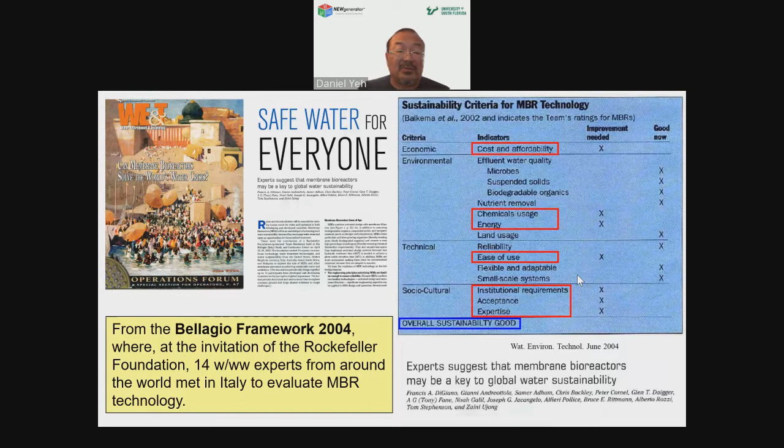I mentioned the 14 water and wastewater experts, and I knew there were a lot of big names, but I didn't know everybody. What I didn't realize until much later is that one of my collaborators in South Africa, Chris Buckley, was one of the authors on that article. We worked with Chris through the University of KwaZulu-Natal in South Africa, and Chris is very well known and respected in the field of sanitation. It was really because of him that we were able to do the project in South Africa. I didn't realize he was one of the authors on that article until it dawned on me, and it came full circle - Chris and I were like, wow, okay. He spent some time in Bellagio, came up with ideas with other people, and planted the seed. Then somebody else came along and working with them made it possible.

Unfortunately, we lost Chris very recently, a few months ago, and it was a huge loss. I think this is a void that can never be filled, because he had a unique combination of not only being technically savvy, but also superb interpersonal and networking skills. Everybody knew him and everybody respected him. It's very difficult to find a person like Chris Buckley. So, Chris, thank you for everything you've done for us, and we miss you.